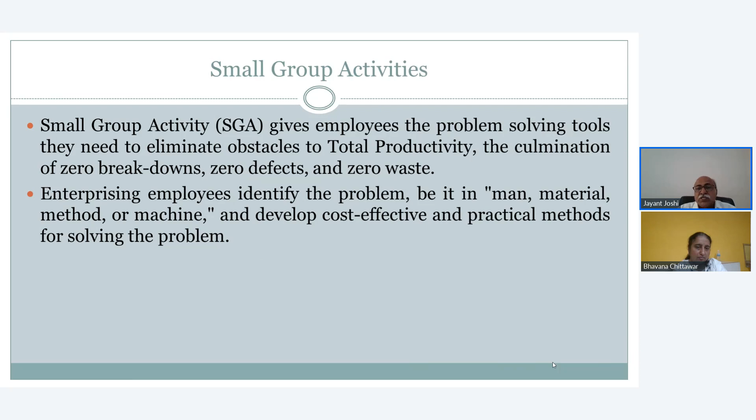So, as I said earlier, an enterprising employee should identify the problem, be it in man, material, method, or machine, and develop cost-effective and practical methods for solving the problem.

I'm talking now about SGA activities by a group of employees at operator level. They aim to solve problems that occur at the place taken care of by each employee, and put emphasis on participation and teamwork. The operator is the person who knows what exactly the machine is doing, what is the idle time, why it is not operating efficiently, or whether there is a chance to reduce speed, close the blower, or stop anything running idle. That operator knows very well.

So it is always advisable to have a small group team which includes the actual operating person, so that he knows what the machine is doing and what it is capable of, helping to increase productivity and reduce idle time.

Factories can apply small group activities to many kinds of work, along with normal work or other measures already underway. If any project is going on or a new machine is under installation, you can also apply small group activities there, so that in the initial stage you can get rid of small issues and improve productivity or decrease energy consumption.

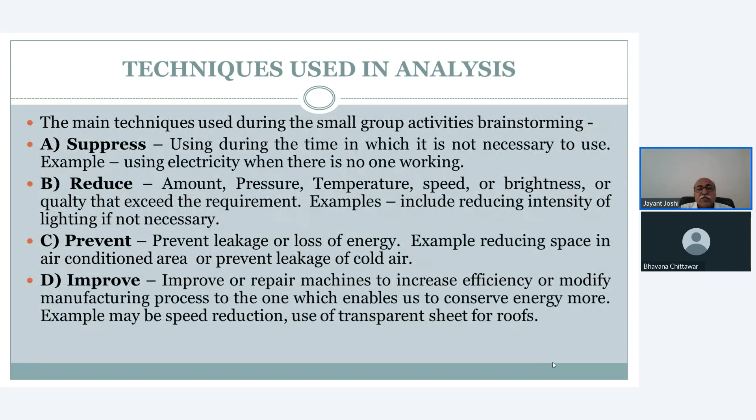The seventh, last one is increased production. Examples include improving the production process, which improves specific energy consumption for the production. So what are the main techniques we have looked at in brainstorming? Suppress, reduce, prevent, improve, store, change, and increase production - these are the main things we can see.

So now what is the relationship of small group activities and energy savings? Small group activity recognizes problems that actually exist in the workplace, because they are the best persons to know what exactly is going on there. Then they can brainstorm and gather opinions on the possibilities of energy saving. Then they can talk to the management or representative of their small group activity team, convey this, and contribute to energy saving, and then sustainable energy, which will be helpful in applying environmental management. So lastly, it will be helpful to the company as well as for the environment.

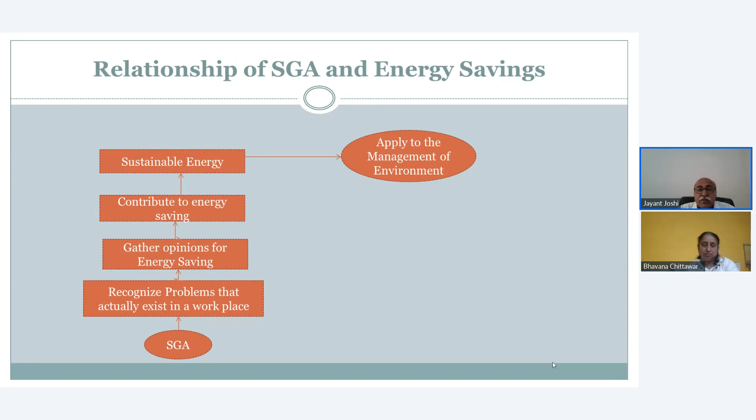Now, what are the energy management practices? Basically any energy management or plant management, all stages depend on the PDCA management cycle - plan, do, check, and act management cycle. I have shown this here graphically.

So if you talk about thinking ideas, that is basically planning. Then you have to improve the plan. Whatever idea is generated through small group activities, you have to improve it and then evaluate whether it is really helpful or not.

Then after evaluation, you have to implement it. After implementation, results are to be monitored - that is check. And after checking, if anything is wrong, then we have to think again and make improvements. So it is a closed circle, and this is called the 10 stages of success.

So the 10 stages of success is same as what we have seen, with only small changes. These are top management policy, proper organization - these are all the 10 steps. We will not go through that again.

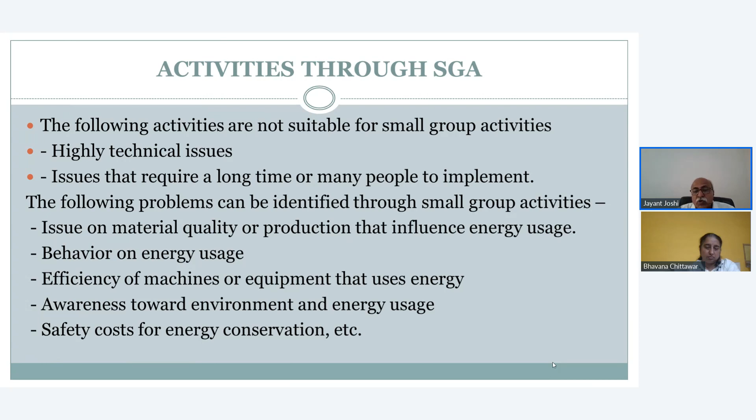So it is better to talk about the present. Don't emphasize past mistakes - there might be mistakes, because if you work, mistakes are going to happen. There might be some, so don't always emphasize them.

Don't be worried about theory or principles. A lot of people worry about theory, talking about graphs and all these things. But we don't need to worry about that.

Don't spend too much time in discussions analyzing problems in the meeting room. You have to do gemba - go to the actual site. You have to present at the actual site, so don't discuss problems only in meetings. Discuss the problems on the spot only.

Don't think that an activity can be done perfectly from the beginning.

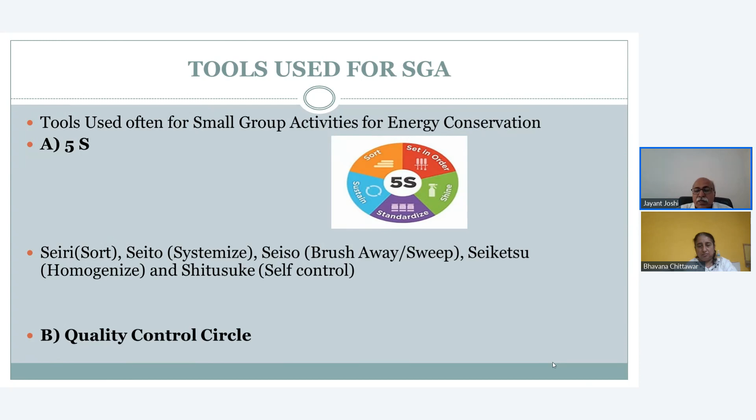Then quality control circle, as you are all aware. These are the tools used. So now we will talk about energy conservation.

What are the best practices? I will talk about it now from an industrial view, because the small group activities topic is over now. So now I will talk about the best practices in energy conservation.

What will be the best? So a centralized cross-functional team you should have. Then new technology adoption. The company must always be adopting new technology which will be beneficial for productivity and also for energy conservation. Then encourage innovative ideas. If someone comes with an innovative idea, don't discourage him. So encourage innovative ideas, analyze it. If it is not okay, then forget it. But you should analyze whatever innovative ideas come to you as management.

Then small group activities, what I talked about. So these are the best practices. Then routine monitoring and analysis. Once an energy conservation measure is made and you have self-audited and forget it, it is not a best practice. There must be routine monitoring and analysis. Otherwise, what will happen? You arrested the leakage that day, but after 15 days or after 1 year, again the same leakage is there. So there is no point in it.

So there must be routine monitoring and analysis, and you should have a benchmark of your own team, and you should monitor month-wise what is the specific consumption of energy. So that type of routine monitoring should be there. So, what does a centralized cross-functional team do? It shares views and best practices across the departments or similar factories, keeping energy conservation as the main motto, right? There should be a regular meeting so that they can interchange their views.

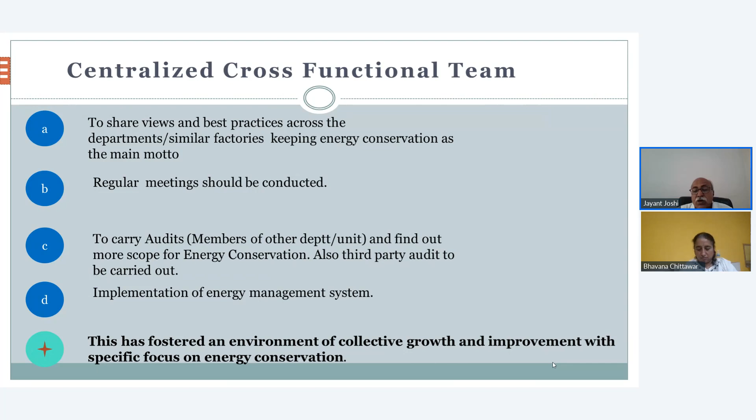So implementation of the energy management system, what I have shown you earlier, implementation of the energy management system in total. So this will foster an environment of collective growth and improvement with specific focus on energy conservation. These are small group activities, examples from the textile industry. But not only small group activities, there are other activities also. What I have said, interlocking of various blowers, motors, fans in the production machines. Then replacement of motors with high efficiency motors.

Installation of time lag switches in various lighting systems, particularly in warehouses where a bay is not usable for a certain period. Then replacement of pumps with high efficiency pumps. Earlier, very old pumps were there, so replacement of pumps with high efficiency pumps. DC to AC conversion of machine drives, because DC has very high electrical consumption. Conversion of electrical heating to steam heating in various machines. Installation of solar lights and transparent sheets.

Switching off the lights or machines on the basis of actual requirements, that is lux value or brightness. Then replacement of powered ventilators with wind ventilators. Reduction in supply steam pressure from source as per the actual requirement. Then time switches for the lighting system where there is no movement. Regular thermography audit for insulation and electrical installation, this is monitoring. Installation of capacitors near loads for improvement of power factor. Use of hot water through waste heat recovery; these are some of the small group activities.

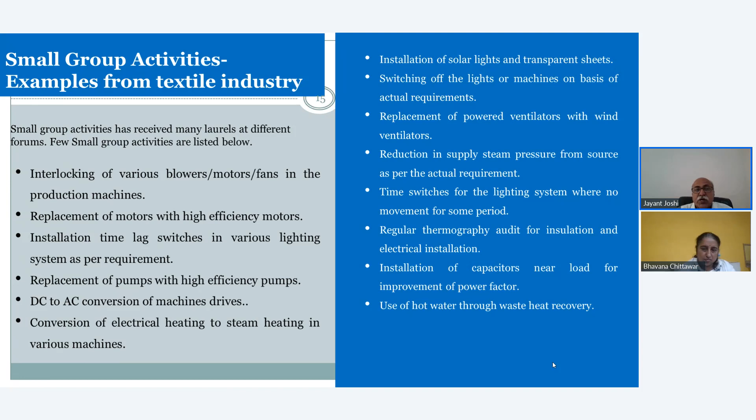Again, lighting control system in the yard room area, lighting gets switched off when no movement is observed, that control is there. So around 1000 units per year saved. There are timers we have used in that industry, so there is energy saving. Rearrangement of the lighting system for luminous intensity at the required specific point. So around 1.6 lakh units saving is there. Implementation of nature switch in street lights; earlier there was a timer, but a timer works on time. This actually works on natural light, so there will be saving.

Use of transparent sheets in daytime. Then replacement of exhaust fan by turbo ventilator. Interlocking of accessories; these are all examples. Replacement of pumps with high efficiency pumps. DC to AC conversion of machines like stenter, warping, TMT. Use of hot water. Then installation of pressure sensors where suction pressure is required. In any machine where suction is there you can install a pressure sensor. You can reduce the suction pressure as per the requirement.

This is the example of one small group activity, repositioning of microfilters in compressors. Earlier, they were located at the outlet of each compressor. They are repositioned in a common filter bank.

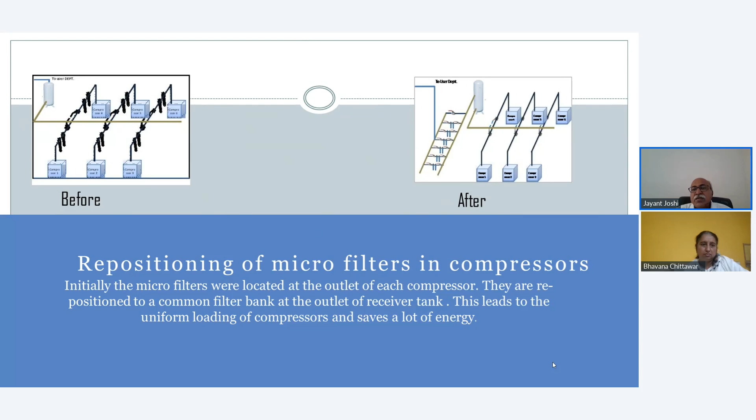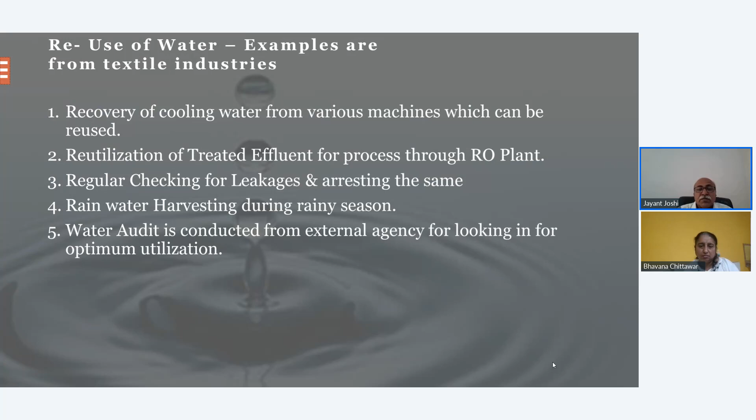This reduces the back pressure of the compressor and results in energy saving. Reuse of water: in textile, water is very important. So, recovery of cooling water from various machines; earlier it was drained, now it is recovered. Then reutilization of treated effluent for process through an RO plant. Then regular checking of leakages, rainwater harvesting, and water audits are conducted.

Now, what are the routine monitoring activities? In case of insulation, there should be regular insulation audits for steam as well as thermic fluid and chilling lines. Then consumption monitoring: close monitoring of the consumption patterns of all the applications. Coal, steam, water, these all come under energy. All this has to be monitored, and if possible department-wise or machine-wise, so you can get better results.

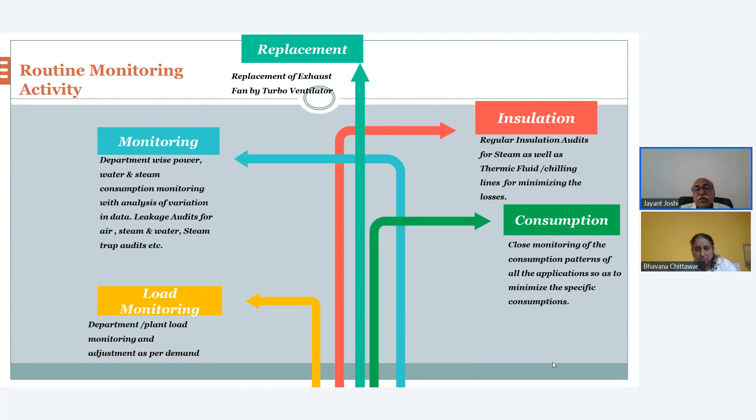Load monitoring is very important, department and plant load monitoring, and it can be adjusted as per the demand. Then monitoring department-wise power, water, steam consumption, and then it results in replacement. So what are the routine monitoring activities? Regular steam trap audits. A steam trap audit is actually not a small group activity, it is an audit type, but a small group can do it with their experience. Then pump audit, water audit, condensate waste heat recovery, improving power factor by installing capacitors at various applications.

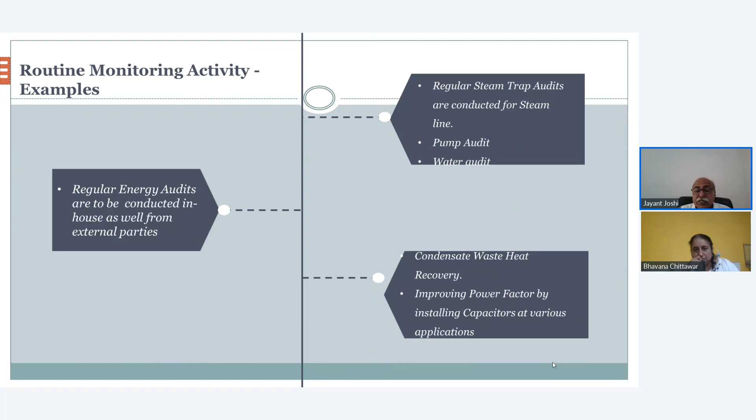Air compressors are a very important part, and wherever air is used in very large quantity, there is always scope of energy saving of around 10 to 12%. That includes pipeline sizing, pipeline leakages, back pressure checkup, so you can always reduce 12%. So what are the regular monitoring tests? Capacity test and leakage test shall be conducted regularly for individual compressors. Then regular internal audits, which a small group team can do, shall be conducted for checking leakages.

Then installation of flow controllers at sections with lower air pressure requirement. Wherever there is low pressure, you can install flow controllers. Then installation of flow controllers on cleaning airlines. Installation of compressors with VFDs, thereby reducing consumption during no-load conditions, as in case of constant load compressors. But there is a catch. VFD should not be used on a constant load; it should be used for variable purposes only.

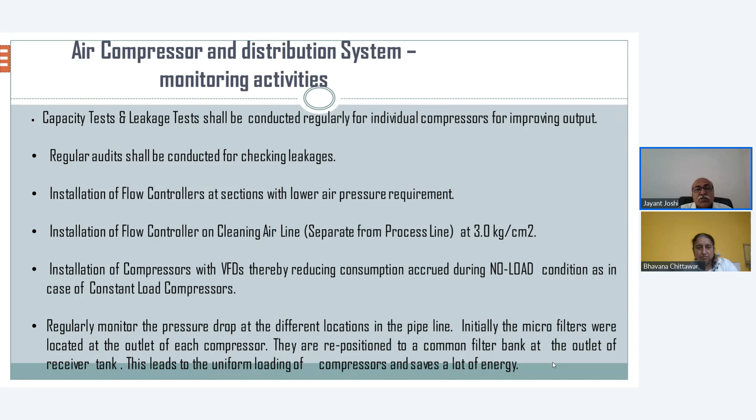I observed that sometimes manufacturers supply compressors at 60 hertz, and it is not solving your problem. It increases your consumption because it works on 60 hertz, and energy consumption goes up like anything; it is related to speed. So it should be very carefully selected where to use VFD compressors, otherwise it will increase your consumption. Then regularly monitor the pressure drop at different locations so that you can take action. So energy efficiency activity helps to save energy, reduce cost and protect the environment.